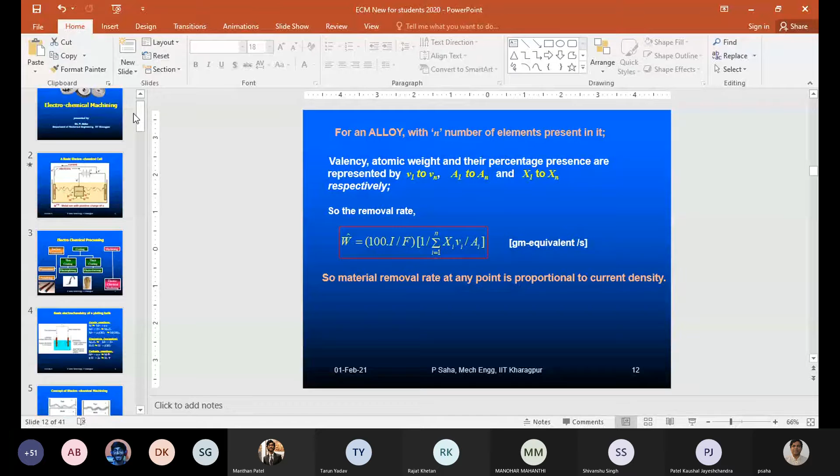So this is our topic, electrochemical machining, which is based upon electrochemistry. So quickly, let's recapitulate what we have seen.

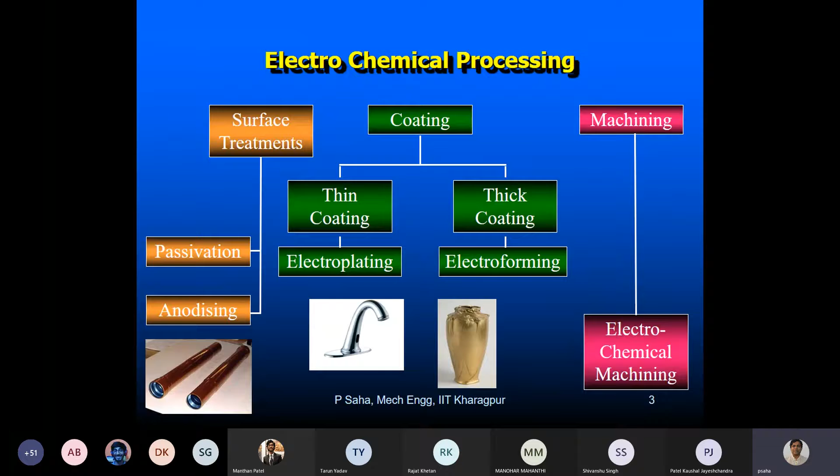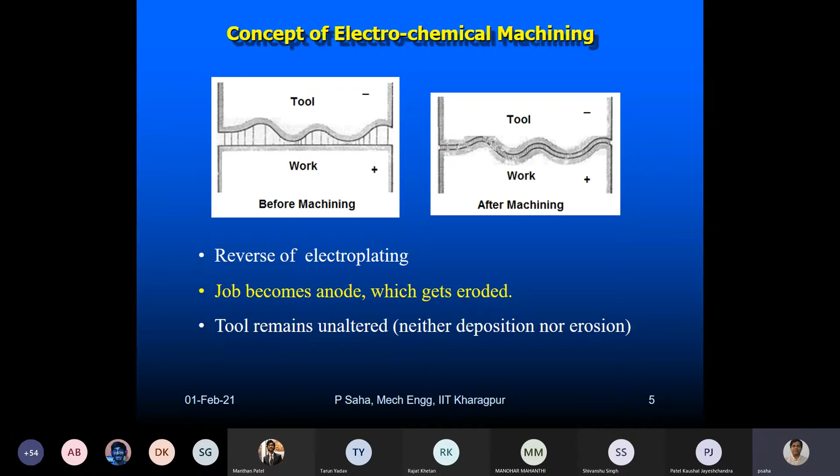Electrochemical machining is similar to EDM die sinking: we first create a tool. In the ECM process, the reverse shape, the complementary shape of the tool, will be created on the job. Since the job is getting eroded, the question is how do we ensure there is no erosion of the tool as we process, because the tool may have been given a shape depending upon our requirement. So what should be the shape of the tool? We try to answer all these questions here.

Just going through this quickly, this was the basic setup of the ECM process, where you see a very simple setup. The actual setup is far more complex. Here, actually, something we want to machine.

So this is my job, which is fixed on a fixture, supported on an insulating base, and the job will also be connected with one end of the power supply. This is my tool, which is also metallic, and either we can inject the electrolyte or force it to enter and exit through this pathway, and there will be a very small gap.

Typically this will be a DC power supply, where the positive terminal is connected to the job to be machined, and the negative terminal is connected to the tool. The electrolyte will escape along with the reaction products, get filtered, and be put back into the system, so that fresh electrolyte always fills up the inter-electrode gap.

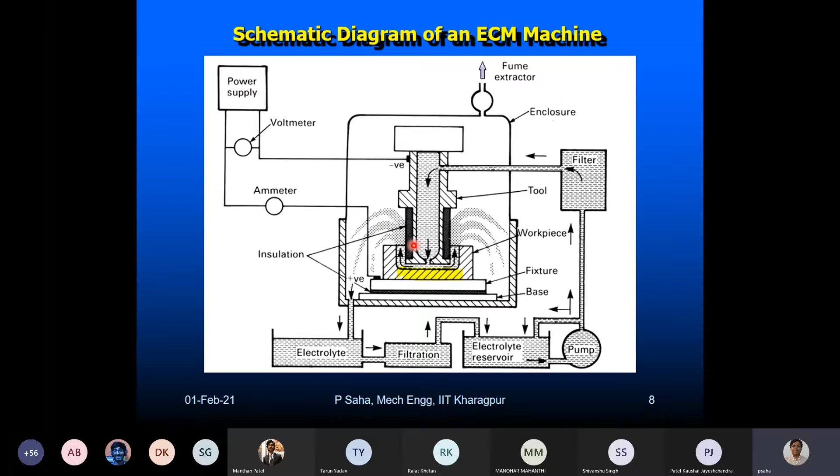So we have seen how to estimate the MRR for ECM, electrochemical machining. We have identified the two Faraday's laws. In one case, the amount of material removed is proportional to the charge which has passed through the electrolyte. That's the first thing. Second, the amount of material removed is also proportional to the electrochemical equivalent.

This is similar to any other electrochemical process, which Michael Faraday gave a long time back. So what is electrochemical equivalent? We know it is basically atomic weight divided by valency, which gives the electrochemical equivalent.

So if we combine these two laws, what do we get? We get the amount of material removed, which we denote by W. So W will be 1 by F into atomic weight by valency, into the total amount of charge flown through the electrolyte during the machining process.

And what is Q? Q is, if we have a constant value of current, the current multiplied by time in amperes. So we get this equation: 1 by F into atomic weight by valency into current into time.

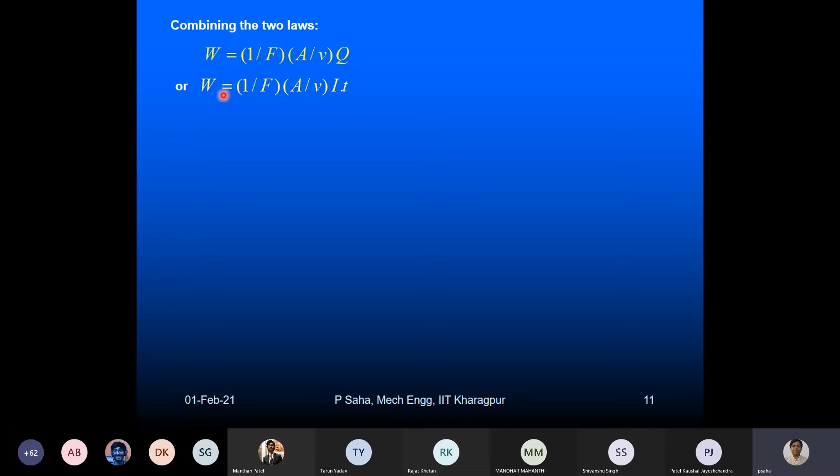So the rate W dot will be W by T, which is atomic weight by valency into I. This will give us how many grams per second we'll be shipping, using the Faraday's constant F value of 96,500 coulombs.

So this is my material removal rate in grams, but since we are machining, what about the volumetric material removal rate? We have to divide the whole thing by the density of the material. So that's exactly what we've done: atomic weight by valency into 1 by F into I, divided by rho. Very simple. This will be in meter cube per second or centimeter cube, whatever dimensions we give for rho, accordingly it will come out.

Now for feed rate: suppose the tool is machining from the top, gradually machining a block of material under its footprint by electrochemical dissolution. If we assume the area of interaction remains constant with time, then the machining current density may also remain constant. So current density Jc, which I denote by J, will be I divided by the surface area of the tool. What is the bottom part, if it is completely flat?

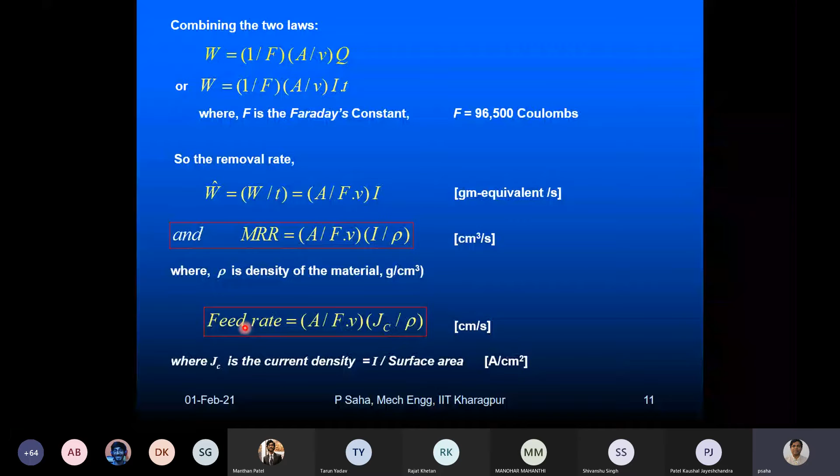So from that, the feed rate is nothing but the dissolution rate - the vertical depth that we machine per unit time. That should be my feed rate, because in order to maintain the machining rate uniform, the inter-electrode gap is maintained constant. So whatever job is machined, the tool will come down and make up for the gap. That is what is my feed rate per unit time.

So this is for a pure metal. But what should be the material removal rate for an alloy? Because a material may consist of various alloying elements, if it is an alloy, most of the time it is an alloy, so it will be consisting of various alloying elements.

Say we are having n number of alloying elements present in the material, whose valency is known, atomic weight is also known, and their individual percentage presence in the alloy is also known. We denote valency changing from V1 to Vn, atomic weight for first material is A1, nth material is An, and percentage of composition - first material it is maybe X1%, and nth material it is Xn%, and so on.

So in that case we can derive, from Faraday's laws, the rate of material removal for an alloy. It is 100 into I divided by F, where F stands for Faraday's constant, I stands for the current, multiplied by 1 upon summation of xi vi divided by ai, where i equals 1 to n.

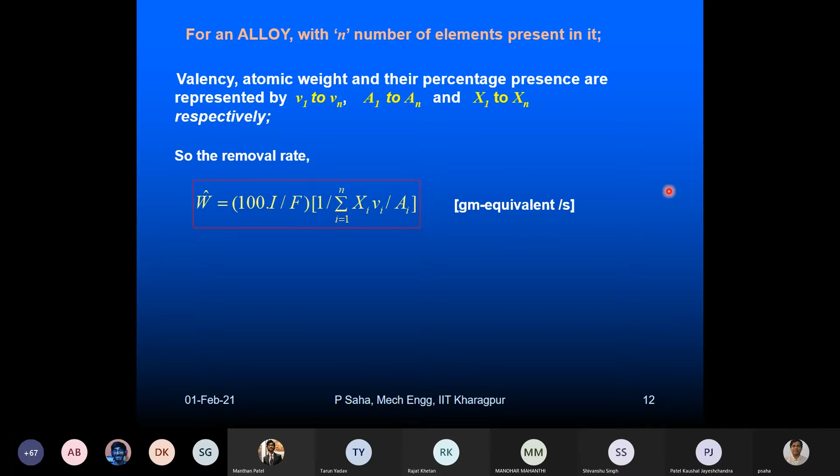What is important to note in this is that at any point of the material, the material removal rate is proportional to the local current density. So if it is completely flat and every point on the job surface is equidistant from the tool, then probably current density will be uniform.

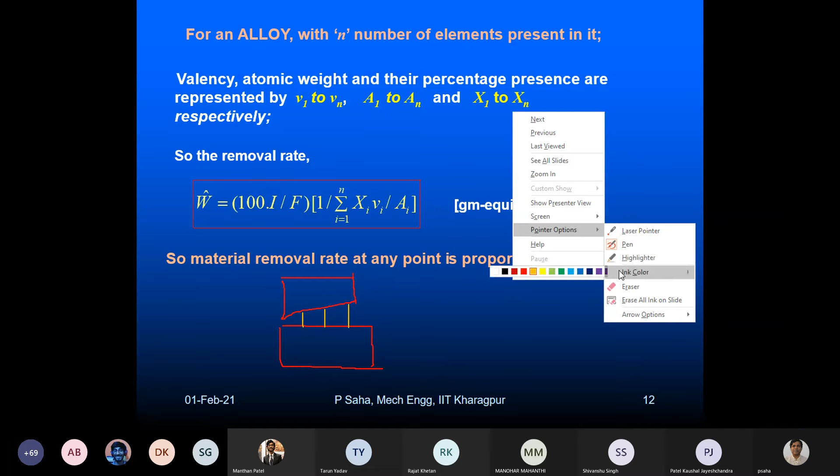But had this tool been a horizontal tool like this with respect to the job, then current more or less would have been uniform all across, current density would have been uniform. This is minus and this will be plus.

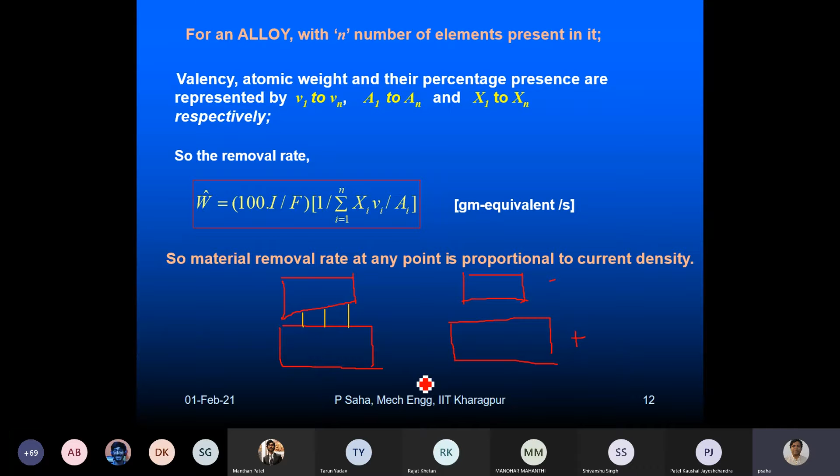Now this is about how the transfer of the tool profile to the workpiece profile happens in ECM. My desired profile is somewhat like this - this dotted line is my desired profile. But we are starting the job something like this. So what we have done is machined that bottom surface of the tool externally, maybe by CNC machining, and given it this 3D profile, which is complementary to the desired surface. Now, when we deploy this tool to machine this job, what will happen?

And there is some feeding device also, and this gap is although very small. With time this should be uniformly get... Why not? Why can't we have this kind of machining flat with time?

This will not happen because of the variation in the current density. The local erosion rate will be automatically adjusted. This portion is much closer, this portion is also closer, and compared to this portion, which is much higher, this distance is higher. So if you look at the machining rate on the surface, because of the variation of the current density, here because of the high current density, machining rate will be high, but somewhere in the middle machining rate will be low.

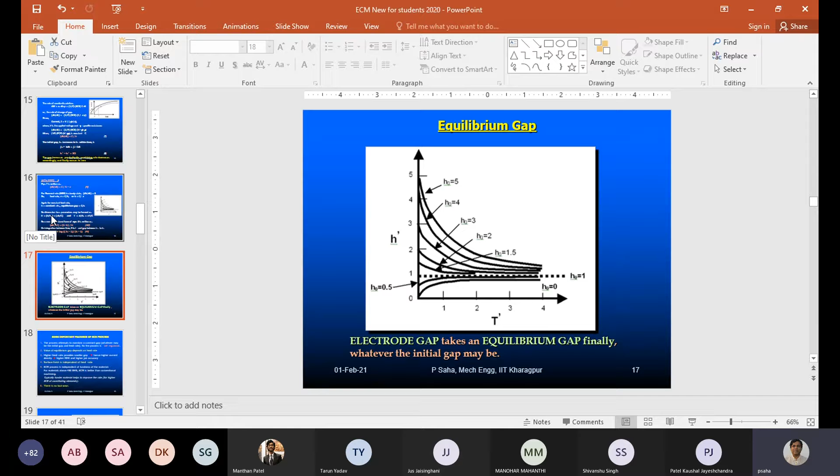Could you just repeat your question? Sir, I just want to hear your explanation again about the formation of dimensionless parameters. Okay, okay, I think I guess I just want to get ensured.

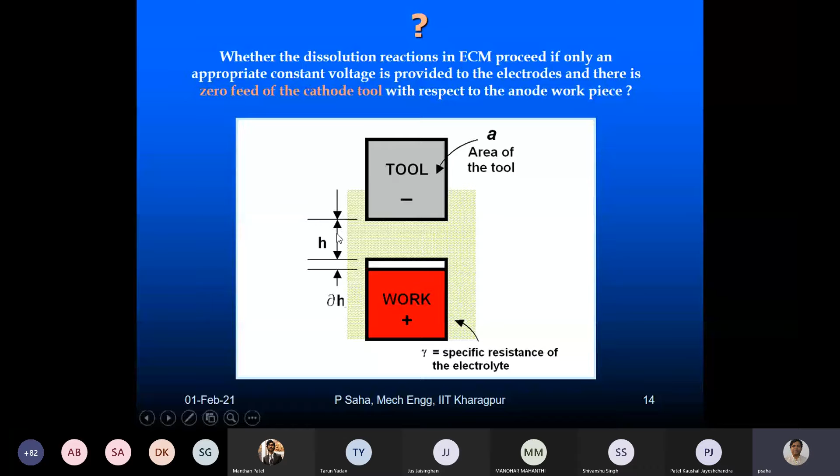So what we are doing, we are trying to know how the inter-electrode gap is changing with time. This is what we want to find out. So H, the inter-electrode gap, is nothing but a dimension having some unit. So in order to do that, we have to make it non-dimensional.

Now for a given parameter setting, the machine will run, and some of the physical properties we can assume to be constant. From Faraday's law, this Faraday's constant, electrochemical equivalent of dissolution, applied voltage, specific resistance, density of the material - these are constant. What will happen if we continue machining?

Whatever may be the initial gap, after some time, either the machining rate will change because the machining condition or gap is not conducive to have a constant machining rate with respect to given parameters. So the gap will adjust, try to readjust, and finally the gap will become stable, and the machining rate, dissolution rate, becomes constant and stable.

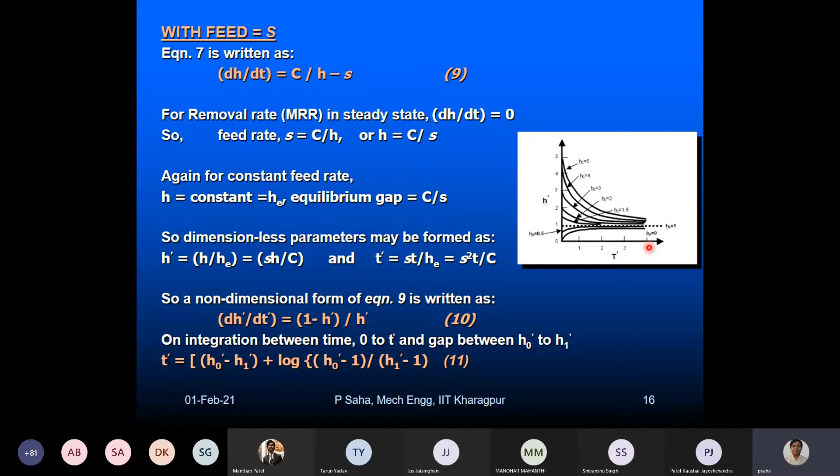Now we have tried to plot this equation here - the variation of H dash with time T dash, both in non-dimensional form. And here you can see we can have different sets of how the gap is changing.

Suppose we have H0 as the initial gap, H0 dash - these are H0 dash basically, something like 1.5 or something like that.

Initially, the more the value of H dash, the rate of change of the gap is more quicker, more steep initially, more faster, whether it is less than equilibrium gap or more than the equilibrium gap. For more, the gap will get shortened with time, but finally the rate of change will come steadily as it nears the equilibrium gap. After some time, for all practical purposes, it will have exactly the equilibrium value. It may take theoretically infinite time, but practically it will reach the equilibrium gap. What is equilibrium gap? When H dash equals 1, that is the equilibrium gap, when H equals HE.

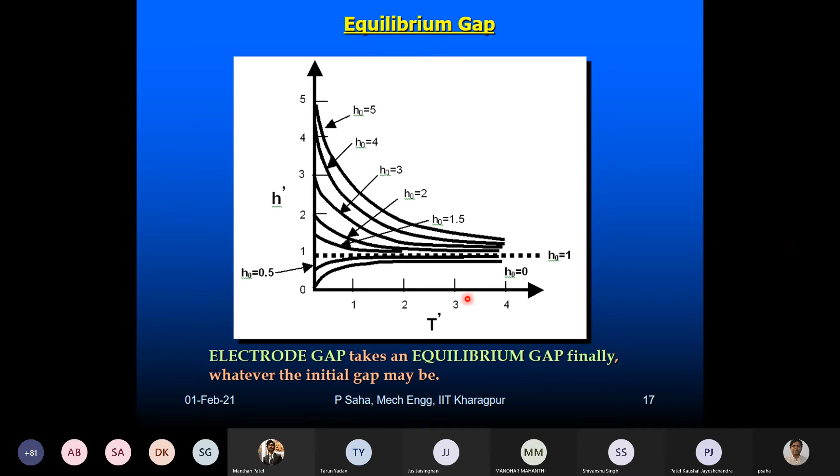Some important features of the ECM process: we have seen the process attempts to maintain a constant inter-electrode gap with the feed rate, so the process is self-regulated. But we can have different feed rates. The value of equilibrium gap depends upon the feed rate, because HE equilibrium gap equals constant C divided by S. So equilibrium gap is inversely proportional, not directly proportional, to the feed rate. So if we move the tool with a higher feed rate, the steady state gap will be low, and if the feed rate is low, the steady state gap will be high.

Higher feed rate, as I said, means smaller gap, hence higher current density. The consequence of a higher feed rate is that it leads to a smaller gap. The moment the gap is small, resistance offered by the electrolyte is less, so we can have higher current density. And again, as per Faraday's laws, higher current density means higher material removal rate. So this is one thing, we get high material removal rate. But if the feed rate is low, MRR becomes low.

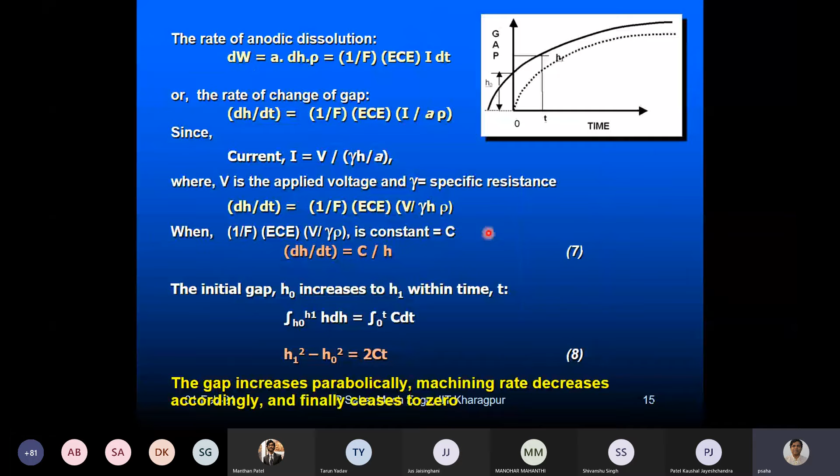The fourth point is surface finish. In ECM, the surface finish is independent of the feed rate and independent of the material removal rate, because MRR is dependent upon the feed rate, but surface finish is not. This is because ECM, theoretically, is basically an atom by atom dissolution process, but not exactly, because we could not have a molecular level finish. Let me show you why.

Out of a chunk of material, it internally has a lot of microstructures. It might have been produced by some cast rolling process, resolidification process, and so on - some kind of microstructure will be there. At different pockets, solidification happens, and accordingly grain growth occurs. These are called grains, and these are called grain boundaries.

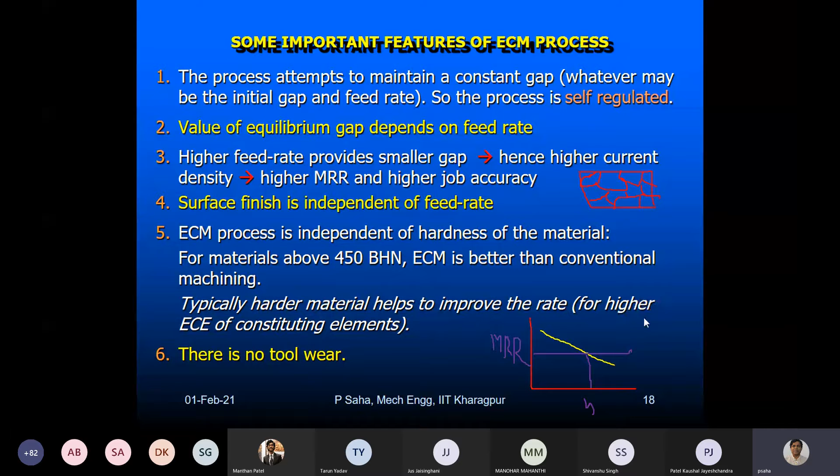But since it is an alloy, when we dissolve it by ECM process, it will depend upon the dissolution rate. For nickel and chromium, due to their multivalencies, they will dissolve much quicker in the ECM process. So this kind of situation from some alloying elements may happen, not always, but there can be this tendency for the rate to be slightly higher as hardness increases. I said it is the same, but this tendency may be slightly on the higher side, this rate may slightly increase.

And point number 6, there is no tool wear, as we have already told, the tool does not take part and get dissolved, and with time you can repeatedly use the same tool to machine further jobs. This is one important aspect, and practically it is very convenient, otherwise it would have been very difficult to do that.

Additionally, what we also know is, say for ferrous materials with a copper tool, if we use sodium chloride electrolyte aqueous solution, put some common salt in water, that becomes your electrolyte. Here the reaction products we have seen will eventually be ferric hydroxides. The job will get dissolved, but ultimately becomes Fe(OH)3, ferric hydroxide.

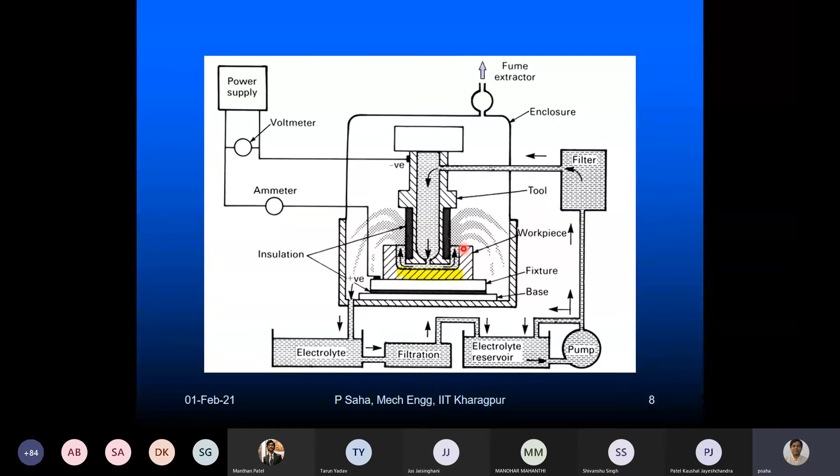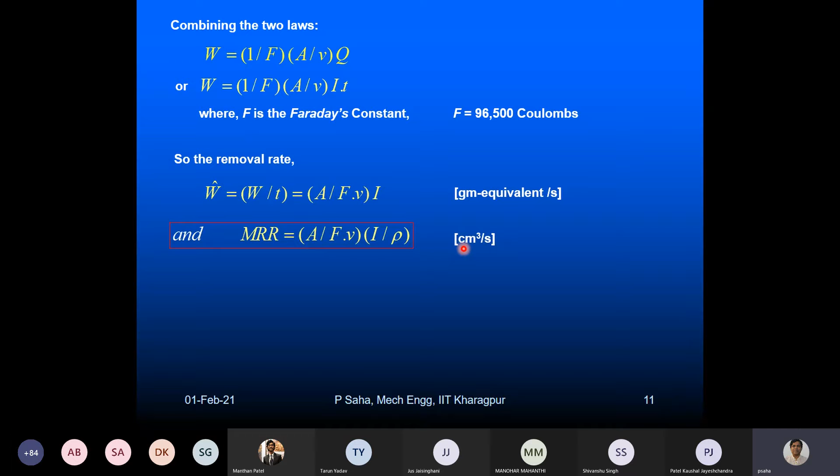So electrolyte is entering, and the gap is small, so by high force it will take away the reaction products. It is very important to have this electrolyte flow at a certain pressure. So after filtering through a pump and a filtering process, there is also maybe some kind of chiller to cool the electrolyte.

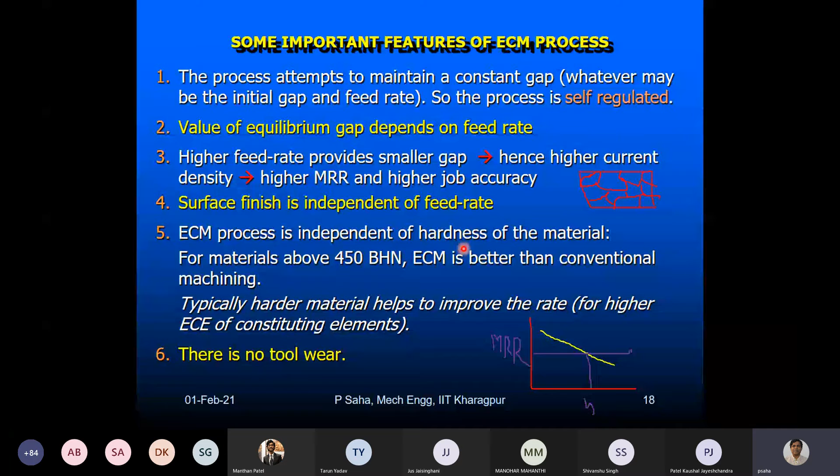To maintain this high pressure and the mass flow rate of the electrolyte, we have to avoid situations like ion concentration buildup. Because of the reaction products, it is very important to replenish the contaminated electrolyte with fresh electrolyte, so that these kinds of situations don't bring down the reaction rates.

Deposition on the tool can be avoided by the electrolyte flow. The reaction products, we call sludge, are muddy kinds of things that get deposited on the workpiece. And another important thing is the overheating of the electrolyte.

What may happen when current flows - ECM is a low voltage, high current process - is that there will be Joule heating of the electrolyte. The amount of heating H in time t will be proportional to I squared, the value of the resistance, multiplied by time. This gives the total amount of heat produced in that time.

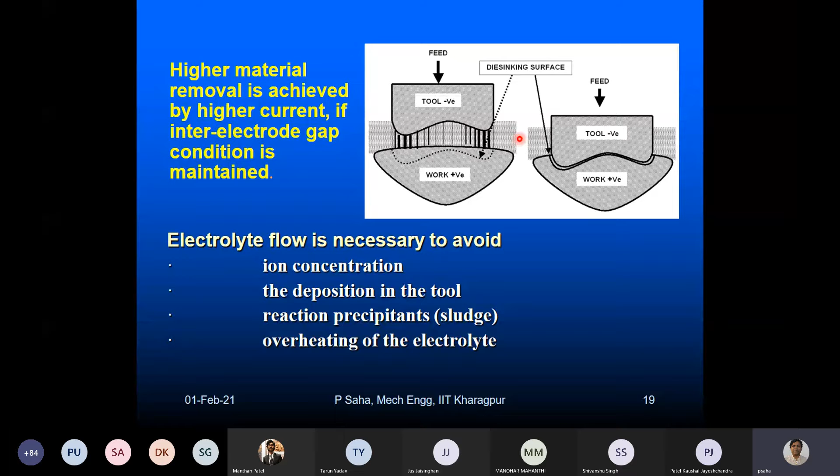So typically, what are the parameters for the ECM process? The power supply is a direct DC power supply. The applied voltage - it's a low voltage process - is 5 to 30 volts. This can be either in continuous mode or a pulse source. The current value is 50 ampere to 40,000 ampere.

This is the total current - 40,000 amperes looks pretty high, but when machining something big like an aero turbine or big impeller, the current value will be pretty high. But what's important is the current density, which is also high - something around 10 to 500 ampere per centimeter square, pretty high amperage.

Now, electrolyte wise, type and concentration: mostly used is sodium chloride aqueous solution, maybe 60 to 240 grams per liter. Also in some cases we use sodium nitrate, around 120 to 480 grams per liter. This is the lower limit, and the higher limit is 4 times the lower limit, in both cases.

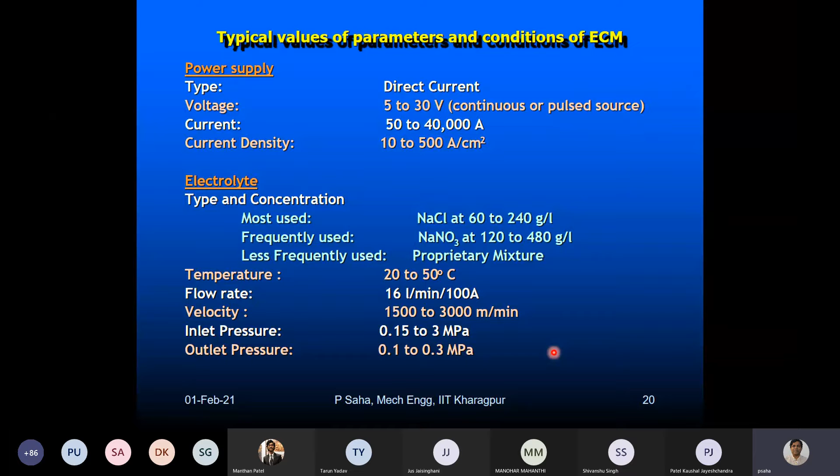Velocity is 1500 to 3000 meter per minute - that's the electrolyte velocity across the gap. Inlet pressure is around 0.15 to 3 megapascal, and outlet pressure is 0.1 to 0.3 megapascal. Of course, the inlet pressure has to be higher than the outlet pressure. These are some of the parameters we can have for ECM.

Now, working parameters wise, the frontal working gap. Frontal working gap means, say we are doing some kind of small machining - this is the tool and this is the job, connected to a power supply. So this gap is the inter-electrode gap, something between 0.05 to 0.3 millimeter, that is 50 micron to 300 micron.

Now feed rate, practical values will be something between 0.1 millimeter to 20 millimeter per minute. That means you can have a dissolution depth in 1 minute as high as 20 millimeter, pretty high.

Electrode material could be electrically conductive, and typically all these things are thermally conductive also. So brass, copper, bronze, they are all very good and can be machined and given a shape like this easily with conventional machining. Then this is used as the tool for the ECM process.

Surface roughness, as I said, you cannot really go for very nanometer finish - something between 0.1 to 2.5 micron, mostly in terms of micron. Tolerance wise, if we suppose we want a dimension of 100 millimeter, to what accuracy can we do? For a 3D shape, we can get something around 0.5 millimeter; for a 2D shape, 0.05 to 0.2 millimeter.

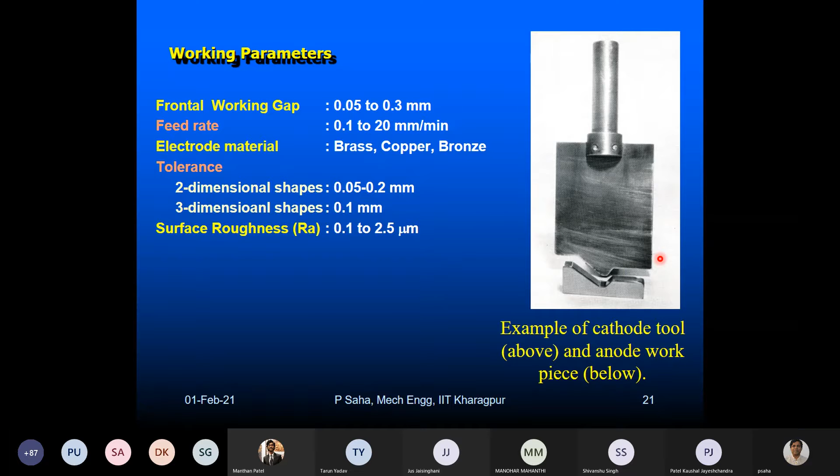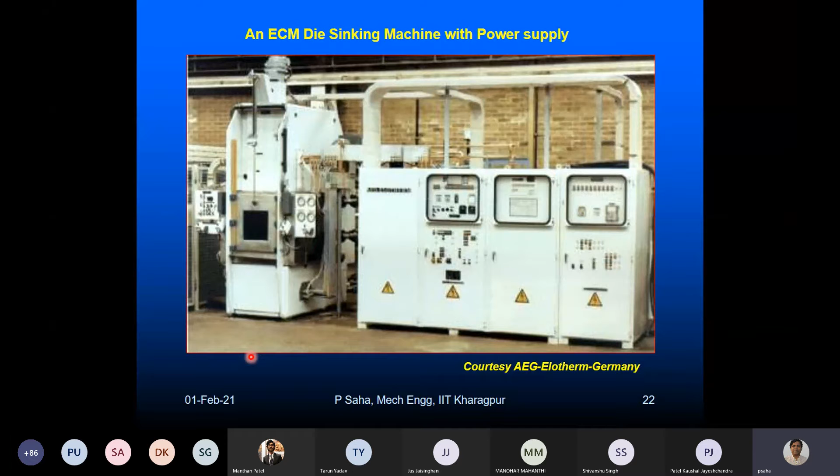So that these hazards are avoided, and this is the feeding device which you cannot see, devised through some mechanism, motors and all. These kinds of things are there, and on this side, probably what you cannot see - the electrolyte recirculation, pumps, chillers - all these things are there, and this is where your actual job is machined. This machine is from AEG Elotherm, a German company, who manufactured it.

Now, how will these tools and jobs look like? With ECM, we now understand we can control the process - we can control the machining rate, we can control the inter-electrode gap, we can give a shape to the component. Even for that, we have to make a complementary shape on the tool.

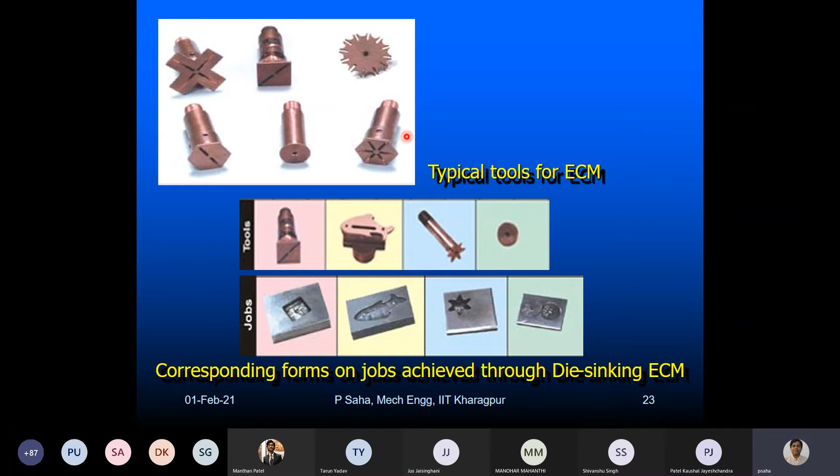Say this is the tool, the corresponding job is this - this is simply sinking, a square type of job, square type of shape. What is this? This is the tool shape - this fish kind of thing, and this is what has been generated. This star kind of thing which has been generated here, the cylindrical shape which has been generated here. So any one of these shapes can easily be replicated and done onto the job like this.

In summary, the material removal rate in ECM does not depend upon the mechanical properties of the metal, like hardness or tensile strength. It does not matter. But it depends on the workpiece composition, because finally the atomic weight and valency of dissolution will dictate the rate, so it depends upon the composition.

Accuracy of ECM depends on the shape and dimension of the workpiece being machined. Approximately it is from 0.05 to 0.2 millimeter using continuous current. But when you use pulse current, compared to continuous source, pulse voltage gives better accuracy. This is because the entire charge is segmented into a number of pulses, and during every off time you get some time to restore the inter-electrode gap towards its original conditions in terms of ion concentration, temperature, and reaction product removal, so that the dissolution rate across the gap remains uniform.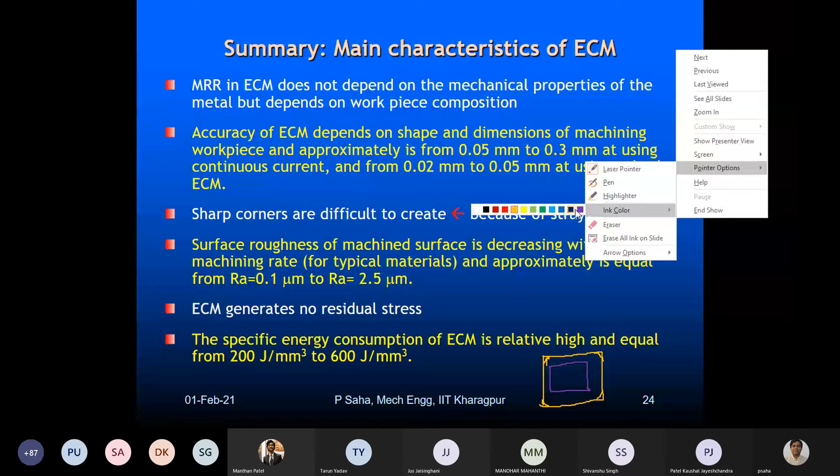This is also because of stray current - both sides get machining and some stray current will be there. For example, when you machine something with a tool, let me draw a little bit. This is my tool.

This is the job surface. This is the nearest point, and we can expect the machining to happen only under its footprint. But if the gap is more, because of this distance, the stray current also flows far away from these areas. So although most machining happens here, there will be little machining or electrochemical effect occurring a bit away from the desired places. This is what is called stray machining, and that's why these overcuts are there - this kind of shape comes because of the stray machining in the hole created by this tool.

Surface roughness of the machined surface decreases with increasing machining rate, and is approximately equal to 0.1 micron to 2.5 micron.

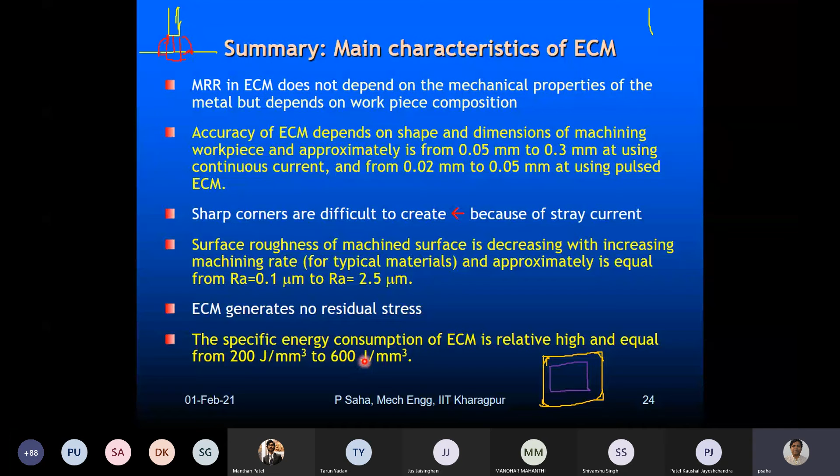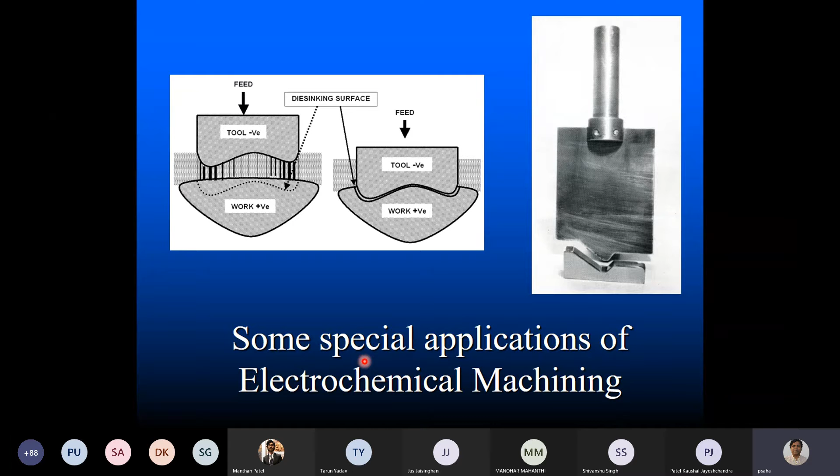So let us now see some special applications of the electrochemical machining process.

First, we see the simple electrochemical cutting process. In ECM you have to have a conductive tool, and the job you are machining, and this is a non-contact process. The inter-electrode gap will be flooded with electrolyte, and by flow of charge it will have the dissolution process. You cannot allow the tool to touch the job, otherwise short circuiting will happen.

Now in the cutting process, we take the tool as some kind of parting disc, cylindrical discs mounted on this tool. The distance between them can be adjusted depending upon the slits we want to cut, and this shaft is made to rotate on a fixture. If this block has to be cut into 3 pieces, knowing this distance, the discs are adjusted so that with time, in tandem with the machining rate, this will slowly move up, and eventually these pieces will be parted off. This is one way we can do it.

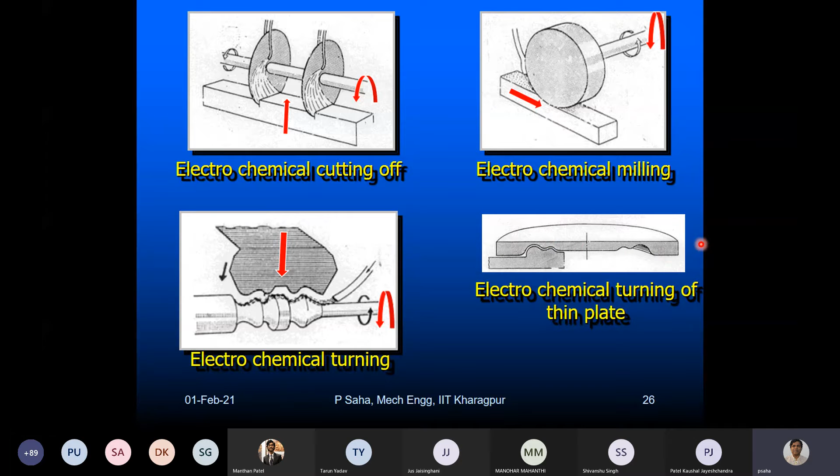Now suppose we want to make some shaping operations, say for this kind of aerofoils. We want to give two shapes, one on this side, one on this side, out of a rectangular block. Initially it was a rectangle, these black portions, but from that we have given these shapes through the ECM process. This may be one component of a turbine blade, small, such kind of small profiles can be created in a chamber like this.

This is electrolyte in, electrolyte flows through this chamber so that this can always be maintained. Tool is fixed from both sides and tool can approach. Job is held through some fixture and tool is moving from this side. So this tool gives these features because of this profile, and this tool creates this profile. This will be connected to the positive, and tool will be connected to the negative terminal. So this is a shaping operation.

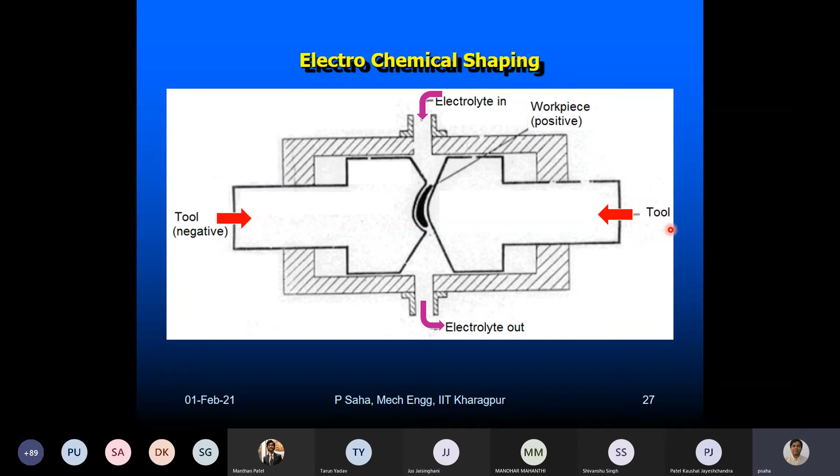Say for example, when you have a much bigger shape, say from electrochemical shaping operations, this is the cathode tool, much bigger. Electrolyte flow is there, and out of this kind of complex profile can be easily attained with time. Nothing happens to the tool, as I keep repeating, so tool wear is zero. So the design of the cathode tool shapes to obtain the profile of the turbine blade.

So this we can do on a soft material like copper or brass. We can easily form these things and repeatedly use them to create this sort of turbine blades.

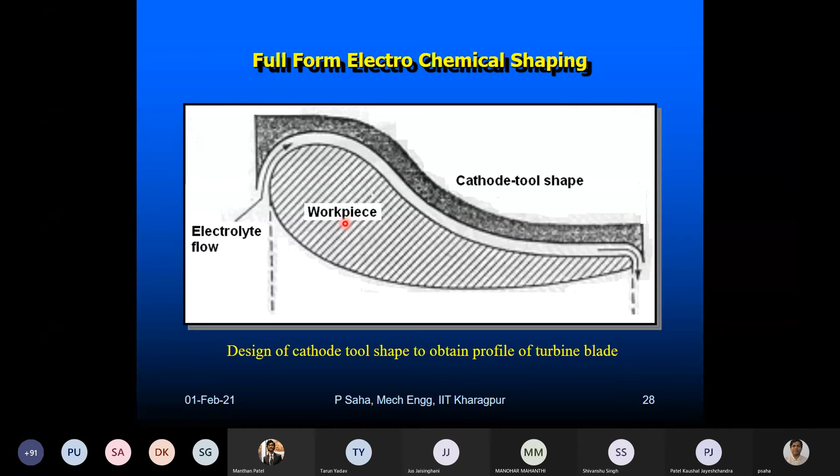Or say for example, we want to have some hole on this kind of curved surface, an irregular hole. How do you do it? Whatever hole drilling we have seen, these are all drilling tools with axisymmetric shapes, but how do you do these things? Through the ECM process, having this kind of form tubes, you can easily make these irregular shaped holes onto these curved surfaces.

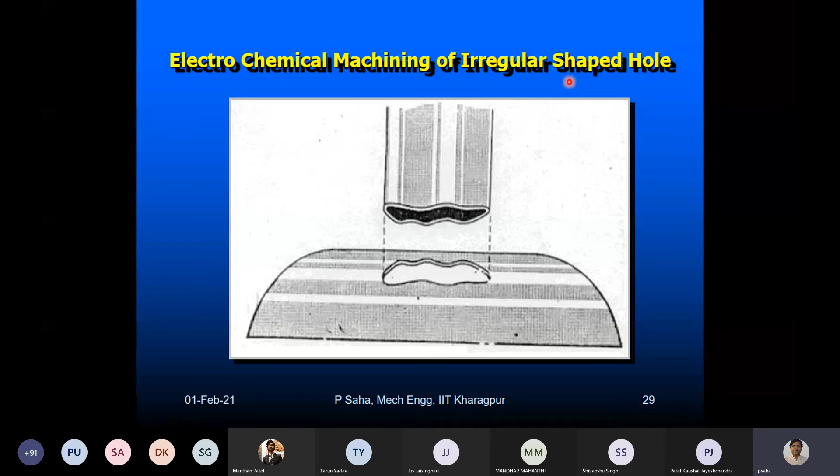Now coming to another very simple thing, the deburring process. Deburring basically means removing the burrs. What are burrs? In conventional machining, because of the physical interaction of the tool and the job, some portion rather than being removed as chips—continuous chip, discontinuous chip, sometimes serrated chips—because of this interaction, material is not completely removed, and a small portion like a sharp edge comes out projected from the job.

This may happen at the entrance like this, and at the exit also it may happen like this. These are called entrance burrs, where the tool is entering, and this could be called the exit burr. Both sides it's happening. Or sometimes when doing shaping operations or milling, you can have feather burrs, flash burrs on both sides. This is where the machining has a small portion hanging, it gets curled as a rollover burr, or it tends to tear like a tear burr.

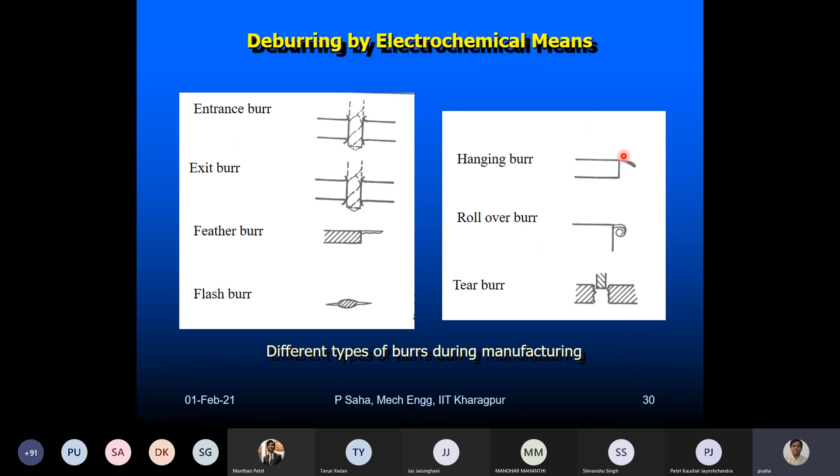But the problem is there after some application time—say you have two mating surfaces, one sliding over the other, like a tribological surface. After loads are applied, after some time these burrs may get detached. When this burr is there in the actual field application area, it will go and mix with your lubricating oil or fluid, or get stuck between the surfaces. Although you have lubrication, this puts additional forces, causes scratches, spoils the surface, and increases the coefficient of friction of the mating surfaces. So the best way is to get rid of these burrs before putting the component into actual operation, to avoid the problem before it creates much more hassle for you.

So we will see how such burrs can be removed by the ECM process. Say for example, we have a hollow cylindrical component with a hollow central portion and two sides. This component we are going to machine, trying to identify the burr. Here we have some kind of burr at the entry point, on both sides there are burrs, and this has to be removed.

So what we do, knowing this is the point where the tool has to approach in close vicinity of the burr, we make the tool like this, a fixed position tool. This is the electrolyte, the power supply, the electrolyte pump, filter, flow meter, pressure gauge, and we apply this voltage. This is a very simple operation because the charge density is more here, and the closest approach is at the burr, so quickly this burr will get dissolved by the ECM process.

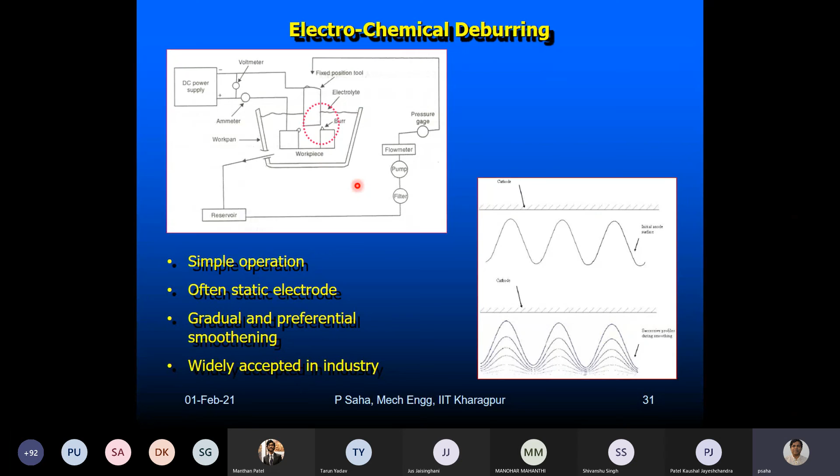So the sharper the portions, the more quickly they get dissolved, and this burr can be removed by the ECM deburring process. Now, the machining conditions for deburring different materials: we can have materials like high carbon steel, low carbon steel, copper alloys, aluminum alloys, and stainless steel. For machining all these materials, burrs are quite common—in some cases more prevalent, in others less so. Depending upon the material, we have to choose the appropriate electrolyte.

For carbon steel we are using sodium nitrate; sodium nitrate is more or less used for all materials. For aluminum alloys we use 5 to 20% NaNO2, whereas for copper alloys we use 5 to 15% NaNO3. The applied voltage is also a low voltage process, something between 12 to 24 volts, and it is a low current density process. Dissolution is smoother—it may take time, but burrs can be removed with something between 5 to 10 amperes, over about 100 seconds for the process to take place.

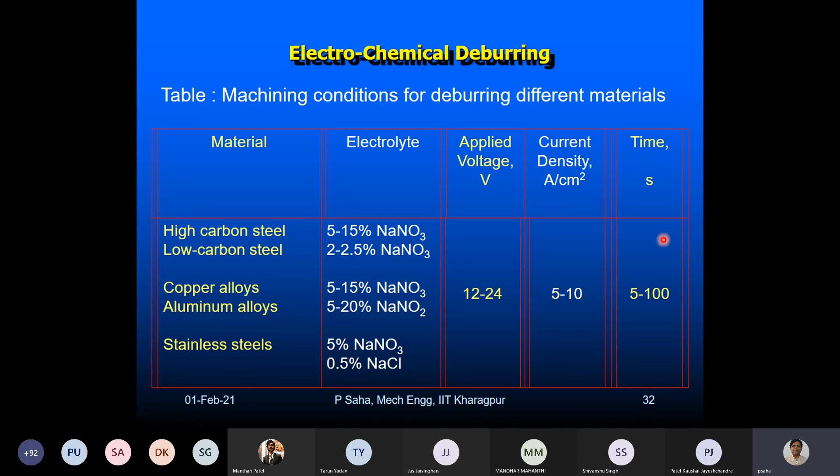For example, I'll show you this: deburring of surface irregularities on the external spline surface of a case-hardened steel shift hub sleeve. When this is initially case-hardened, this kind of surface will have a very bad surface texture, so this has to be smoothened out. The external spline carrying surface irregularity—these dotted portions are the surface irregularities—this has to be corrected.

So for this, we take a cathode tool shaped correspondingly, conforming to this shape, and with this we try to machine and smoothen out the surface by the deburring process. As I said, this is a low voltage, low current process—it may take time, but otherwise it's very convenient, fantastic, and widely used industrially, because it is very economical as well.

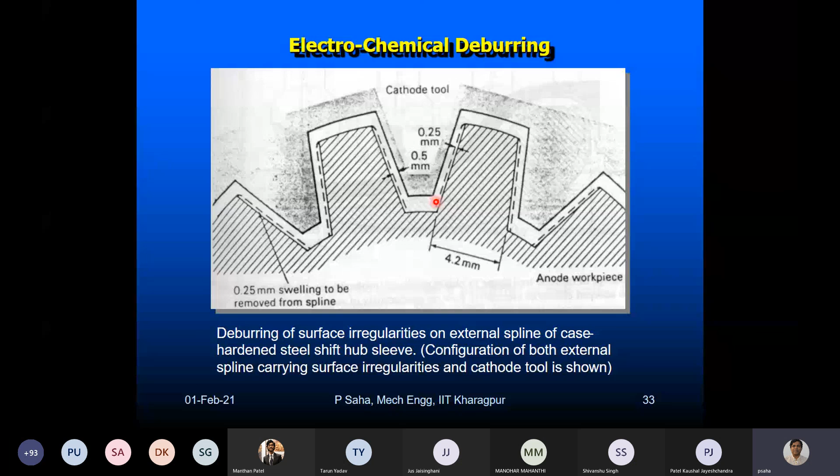So deburring is an industrial process; otherwise, the presence of burrs may be a headache in many cases. I will take this up in the next class, where we'll see some examples of small hole drilling techniques using the ECM process, and how this can be done.